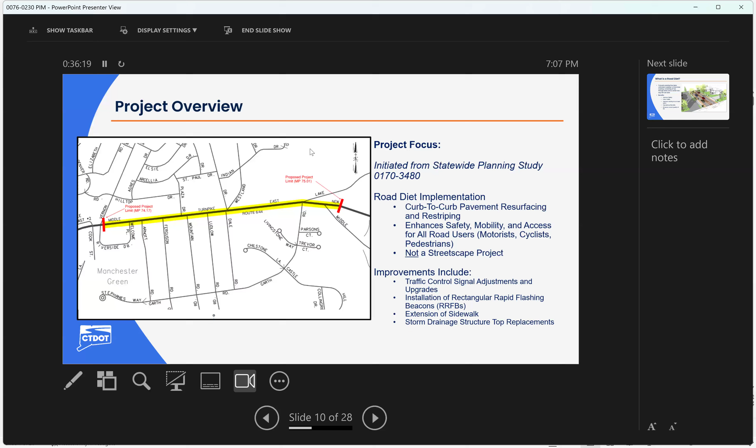So just a little more about what is a road diet. There's 2 images here, before and after. Currently, on the left is the current lane arrangement, and on the right is an after of what is being proposed as part of the road diet. The center 2-way left turn lane, or TWLTL as you'll see it referred, is a 12 to 14 foot wide lane. You have one 11 to 12 foot wide lane in each direction for travel, and a 5 to 8 foot shoulder on both sides of the roadway.

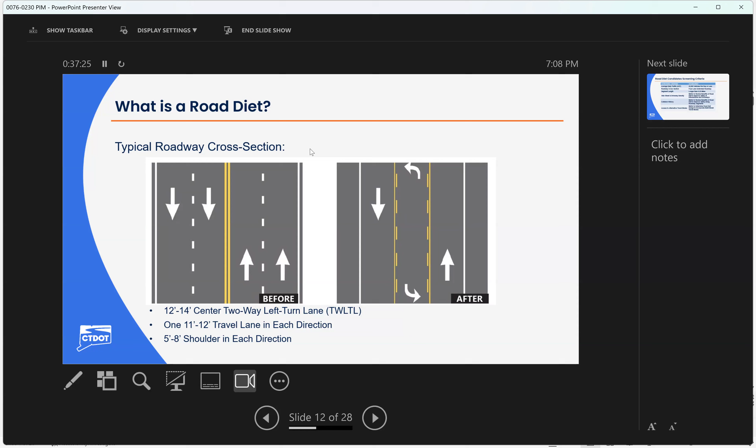The screening criteria used in selecting a road diet candidate includes average daily traffic, which you'll see referred to as ADT. We have considered the roadway cross-section, segment length. We typically like segments longer than quarter-mile. We consider the side street and driveway density, the collision history, and access to alternative travel modes.

A road diet can be implemented at varying ADTs, but the more traffic, the more review and design is involved in validating a design. For this roadway, with 9,000 ADT, it qualifies as a great candidate.

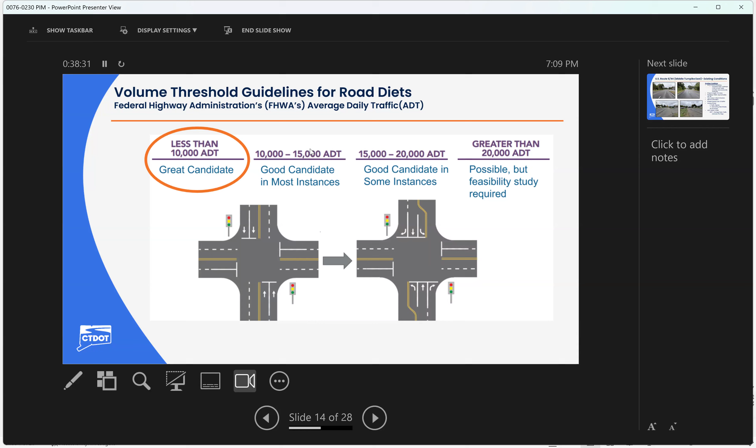Middle Turnpike East, existing conditions. It is considered a minor arterial roadway, which connects major roadways, mainly I-84, to local roads. The project length is roughly 1 mile long. The existing roadway width is approximately 44 to 48 feet wide, 2 lanes in each direction, narrow shoulders, posted speed limit of 35 miles an hour.

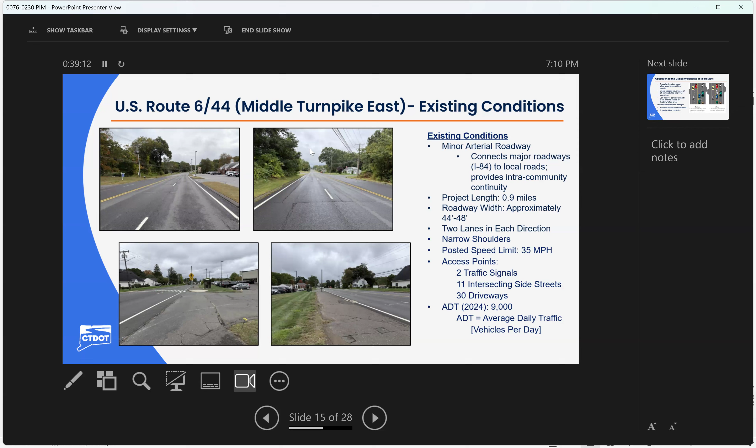Along this corridor, we have 2 traffic signals, 11 intersecting side streets, 30 driveways, and as mentioned before, ADT of 9,000 vehicles per day.

Currently, with your current layout, if you have a vehicle that is looking to make a left turn, they're stopping in their lane, waiting for a gap in the traffic, essentially making that lane a left turn lane. Vehicles behind them have to wait, could introduce rear ends, or they choose to just go around the vehicle and slow down the through lanes.

With a 2-way left turn lane, those vehicles can pull up into a dedicated left turn lane and just keep the through lane going straight. Road diets can improve corridors' quality of life and the appeal or livability of the area.

There are some initial perceived disadvantages of road diets, which include the potential for increase in travel time and the potential for driver confusion.

I want to introduce the term level of service, or LOS. You'll hear that mentioned on the next couple of slides. Level of service is a quality measure of motor vehicle service at an intersection, and it's analyzed at peak hour, which is the period of the day when traffic congestion is at its highest in the morning and the afternoon.

Peak hour turning movement counts were analyzed for weekday morning peak hours and weekday afternoon peak hours. In the morning, we evaluated 7 to 9 a.m., and in the afternoon, 4 to 6 p.m.

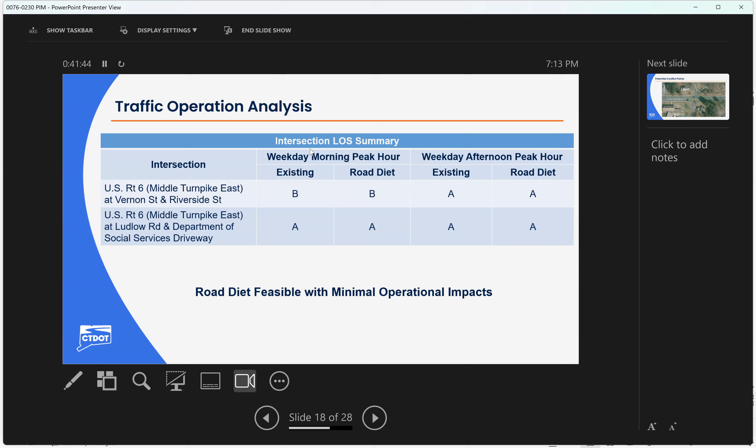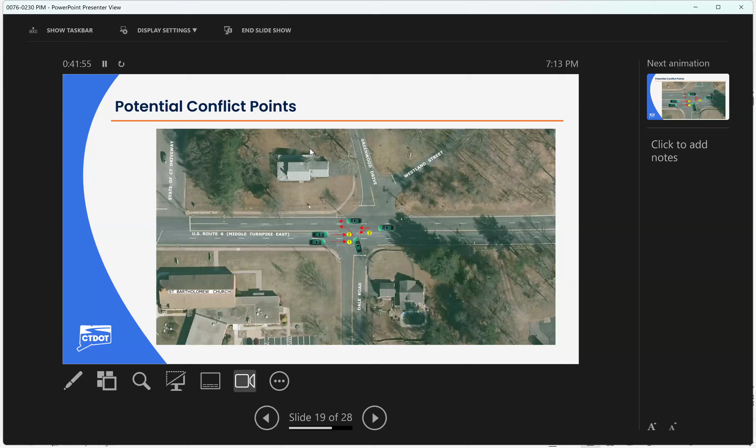Just going to go over some potential conflicts. The current road configuration - this is an example of what occurs with a vehicle taking a left out of Dale Road.

Currently, a vehicle taking a left has potentially 3 conflict points. When making it, they have to be aware of vehicle number 1. If they find a gap or vehicle number 1 stops for them, they have to be on the lookout for vehicle number 2, and then finally vehicle number 3. And there's always that 4th unmarked vehicle that could be getting around vehicle number 3 - it could be a side swipe, or just one more thing to consider when taking a left.

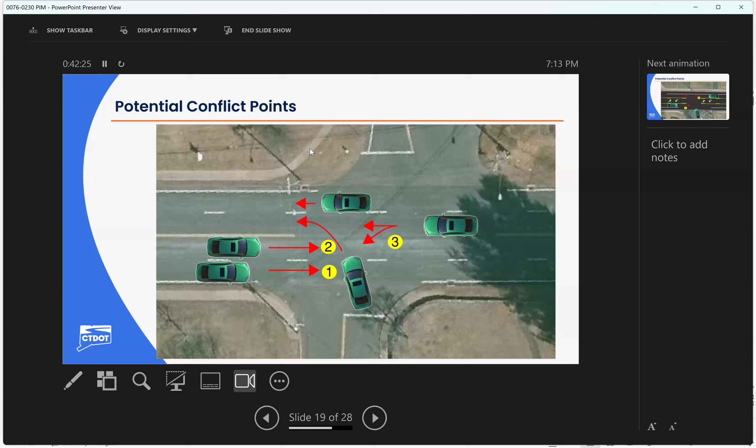With a road diet, take their 4 lanes and make it 1 lane in each direction with the 2-way left turn lane, and you're reducing it to 2 simpler conflict points.

The 5-year crash data was reviewed from July of 2020 to June of 2025, and it shows a total of 51 crashes, with the top 2 crash types being 22 angle crashes and 10 front to rear crashes. We had 0 fatalities, 5 suspected serious injuries, 13 suspected minor injuries, 7 suspected possible injuries, and 26 property damage only crashes.

Typically with the introduction of a road diet, a 26% reduction in crashes is expected, which results in 13 fewer crashes at this site specifically.

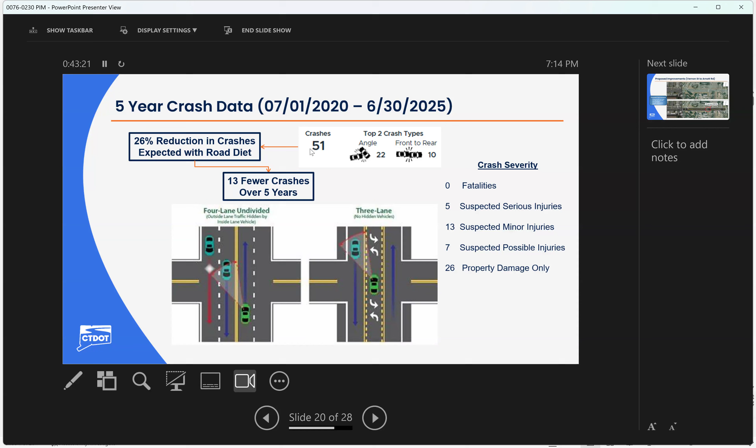I'm going to hand it over to Shane to just go over some of the existing and proposed design.

Hello, everyone, I'm Shane McLean, and I'm just going over the proposed improvements throughout the entire segment. We've broken the segment out into different sections visually for everyone to see.

Shortly after the Arnott Road intersection, we're proposing to install a 2-way left turn lane and then 6-foot shoulders throughout the entire section, sidewalk improvements at the Welcome Place intersection along with an RRFB.

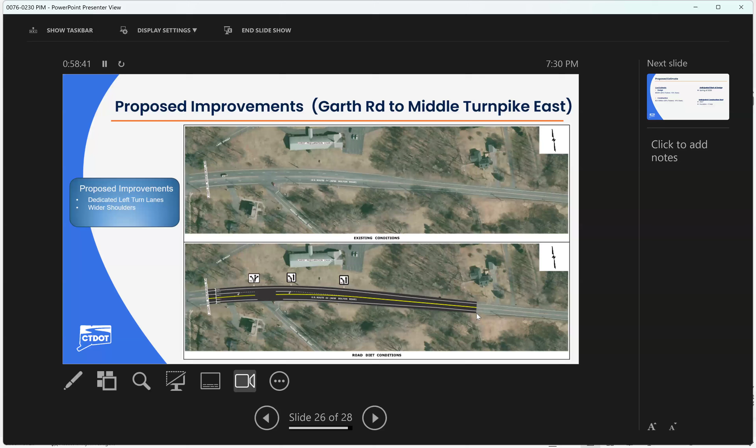When the sidewalk goes past the field by Shady Glen and up to the field, and then hits Shady Glen, what's the vision there? How does that sidewalk work? Do you go into our parking lot and then join the sidewalk again at the end of the Shady Glen property, or does it stay out on the road? Is it part of the shoulder?

Our floodlights and everything are 24 inches away from the highway. We were going to propose the sidewalk within that island between the driveways. There are existing street lamps there - not street lamps, but lamps for the parking lot. We'll probably do some concepts there.

Do we want to move the lights? Do we want to keep them where they are, or move them to one side? Right now we just put in 2D lines - the consultant's going to further evaluate what can be done. My point was that the lamps are so close to the highway now, they're 26 inches from the curb.

So that would affect the sidewalk. Yeah, that's one of the challenges we're going to be looking into.

Aside from average daily traffic, do you have data on speed? You said the speed limit is 35, but we all know what people are actually doing versus 35. Do you know if there's speed tracking, a top speed that was recorded, or whether the road diet could affect speed? I don't know off the top of my head if that's in the road diet study report.

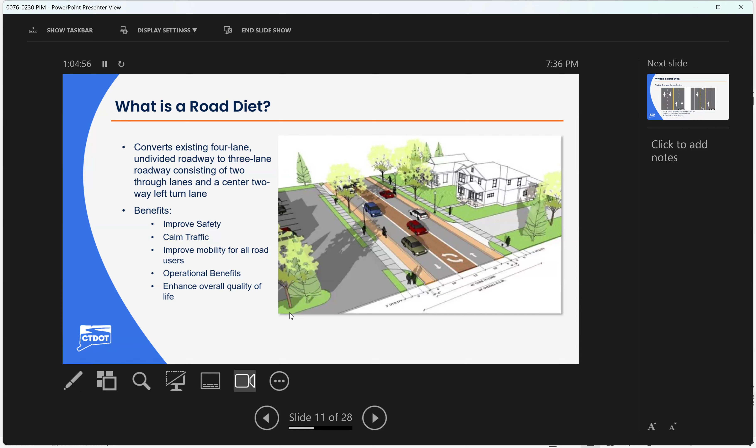I've not enjoyed it in the past, but I was curious—you mentioned bike lanes. Is there anything in this plan that dedicates it to be a bike lane, or is it just a 6-foot shoulder you're supposed to use? Or will there be signs, little lines, even a little white bike symbol—anything that tells a driver, oh, I can actually get there on a bike?

Or is it just a big shoulder? That's to be coordinated with the town. At a minimum, we're going to get a shoulder implemented, and we'll further evaluate everyone's needs. It's good that you bring up support so we know people are biking, and we wouldn't want to put something in that doesn't apply to most road users. The trail being up ahead helps justify a bike lane. We'll talk with the town and see what residents are saying, and evaluate whether we can implement a shared use path or isolate it to a bike lane.

The town wants to see if we're going to reduce the number of lanes. We want 6-foot wide shoulders on both sides, so there's at least some room for travel by bikes. Whether they become actual dedicated bike lanes kind of depends on how it goes. We'll get feedback to see how it fits with the town's adopted plans, but without a grant we probably wouldn't affect the bike lane, since that's some responsibility of the town, which means we'd need a maintenance agreement for the striping and signs. Like we do with our local roads, it's kind of what we've done elsewhere in the city. We'll gather that question, but we're still seeing...

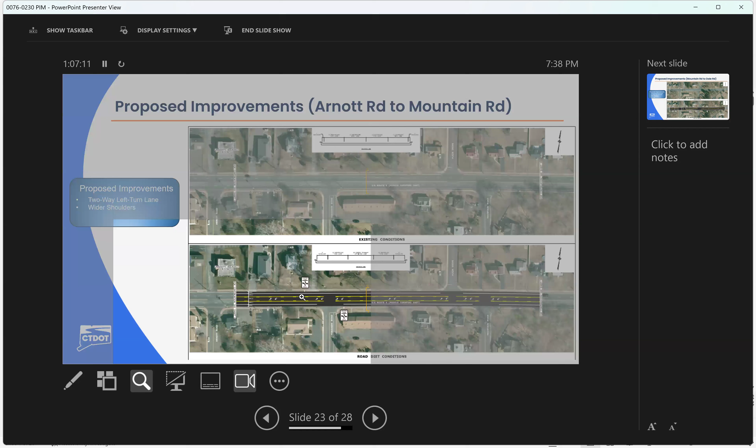You have a question? For the driveways, I know the mock-up is mostly dedicated to the road itself, but for the driveways along the road where there's existing sidewalk, are you guys going to put zebra lines there to show that you can cross, or is it just going to be as-is for crossing the road? So right now, if you look at the construction joints, the pavement would be roughly what we're showing here. Those are more at the side streets.

At a quick look, they're in all different conditions - some of them are cracking. In order for us to put fresh pavement, we'd probably want to repave some of it, but it is not our plan to go down the side streets. Suppose it's something we could look into, but that's currently not part of the project.

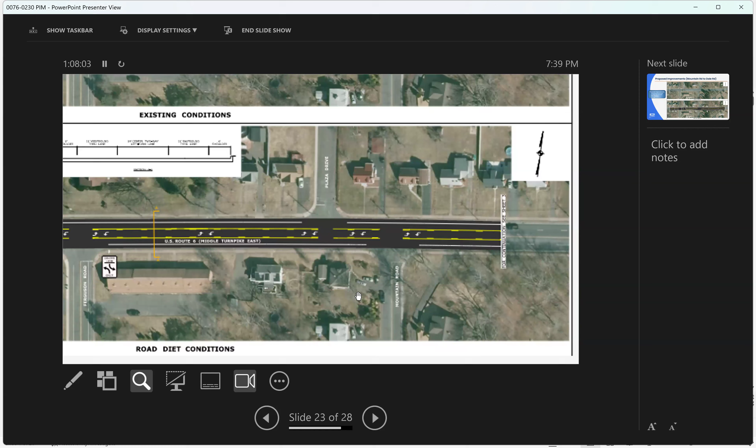You're asking about the painted crosswalks, right? Not the side streets? Yeah, but in general, if I were living on Burning Street and I knew there was a new sidewalk going to Shady Glen, it would be a great indicator to have fresh white lines making sure there's crossings on the south side, like 'oh, here's the rec path to Shady Glen.' Instead of just seeing the road where the sidewalk might be down and it's nice and near, if there was an actual crosswalk marked where there wasn't one before, you can cross, but it's there - now I see there's this yellow brick road.

As it is, I guess it ties into ADA compliance. We would likely install the markings if the ramps aren't compliant. We'll take a look and take that comment back to evaluate it. I think we'll also have to look into the legality of it - I believe it's a town-owned road, so we'd have to work with the town. It might require a maintenance agreement, and we might not be able to do it right now, but we'll take that comment back. Thank you.

No, it's okay, thank you. Okay, yeah, sure thing. Let's take a look to see if there are any questions online. Okay, no one else? Okay, no phone calls?

Okay, hold on - in the areas you guys are evaluating, the recommendations for this area, it's a little deceiving because the town did pave some of those routes. Yeah, we saw Dale Road - Dale Road got paved recently. Yeah, there are some though, like I think Welcome Place. It's part of it, I'm not sure whether it's part of the program.

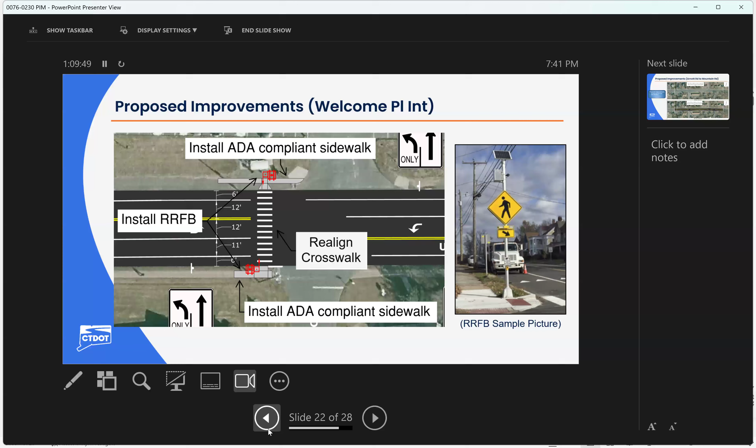Yeah, we'll take a look at it. Probably if we went down the road, we'd evaluate the pavement condition and see if it's applicable to repave, and coordinate with the town. We do have survey data that's much more recent, so that should have the latest information - the visual could be an outdated image, just there to help visualize it. But we'll evaluate those.

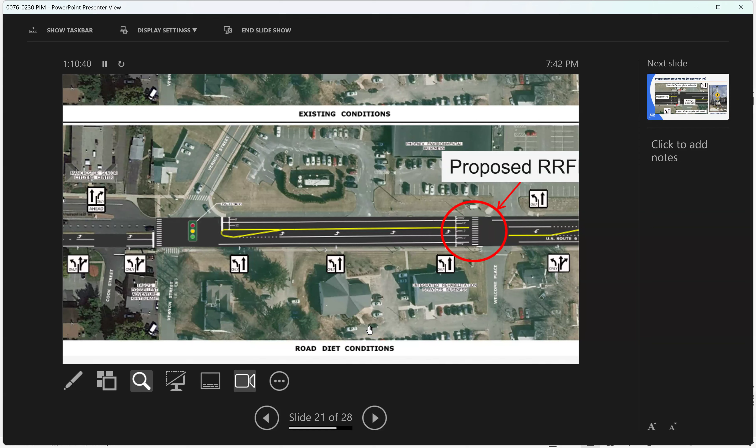And then with the impacted properties - the properties impacted by the sidewalk work - we'll likely be more in touch as the project develops.

So right now, possibly one, and it was just to get a sidewalk in. But yeah, as of right now, we have to just further evaluate them.

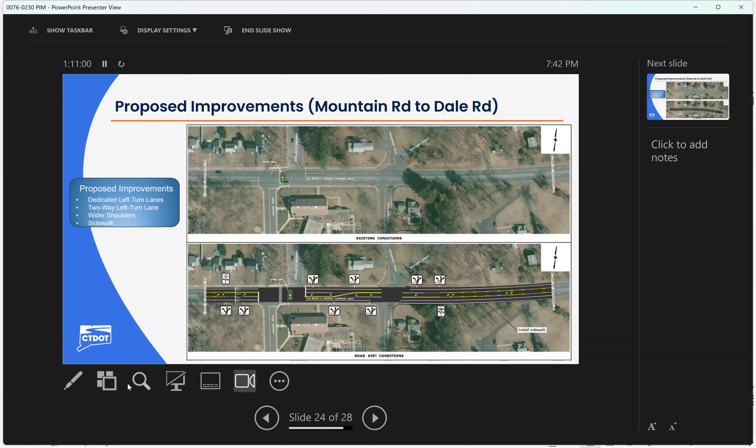I know that phone call. Sounds good, we'll be in.

This is on the surveyors, right where logically the site is. Yeah, we'll take a look, and like I said, I think we'll have to probably come up with one or two concepts, just to weigh options back and forth.

Potentially, yeah, if possible. It'd be off the back of the thing. It's quite an undertaking. I would imagine, yeah. Definitely consider all of that.

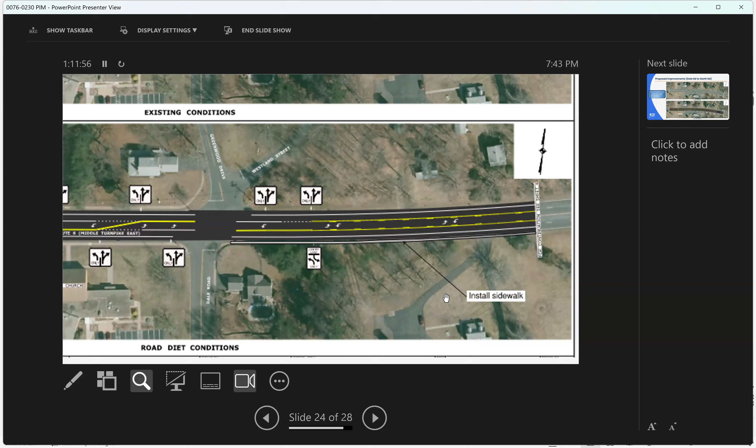So would they consider moving the lamp post if the sidewalk would go through it, possibly? It's very early on, but just looking at the plan, we have ideas we could work up behind it. There's a little bit of room.

Or we could potentially remove some of the lights. How many are there? Now there's 4 or 5. Yeah, if you're going down to 2, the whole thing might have to be reconfigured. I think we're going to have to reconfigure that front area.

We'll have to work more into it. Right now we don't have enough information. It's just a 2D drawing. If it's not broken, don't fix it.

We do want some kind of snow shelf, like just a grass area for the plows to put the snow onto. You don't want to put the sidewalk right up to the roadway because then all the snow will just go right on it when they plow. So you want at minimum a 3-foot utility shelf, and typically that's where your utilities can go.

We'll take a look at it. If it's avoidable, we'll avoid it.

Because it's a ranch style and it's not way back, by the time you back your car out of the restaurant, I get a lot of those, I can see it, the bump. So really there's not a lot of play in that area, but you'll see.

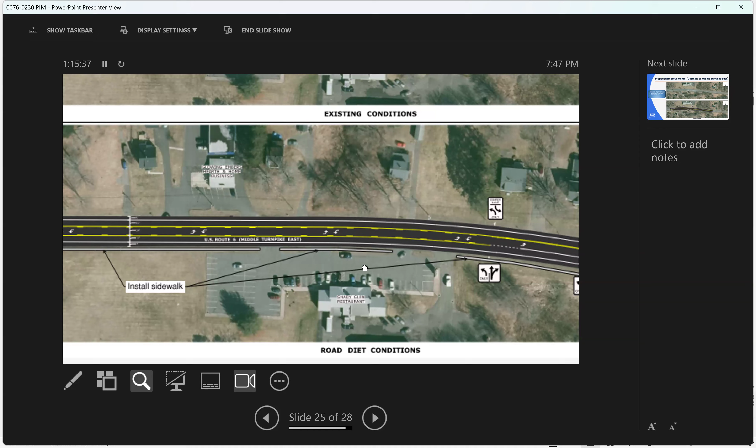I guess it's worth asking, do you guys want fewer openings? Is that something that would work? It works great, we like to have that currently. Because, as you can see the shallowness, you can get in and out of there relatively quickly. If we have fewer, it may be...

Yeah, okay, it's fine, you just prefer the current setup. It depends, because when you pull in and it's so busy, you can't park in front, there's the extra parking lot on the side. There's an exit on that one as well.

But a lot of times people will enter that one and there's no crosswalk to get across, so they can't walk in easily. We now have ramps and stuff to get into the building. All that plays into how we get in and how we get out, to make it more accessible.